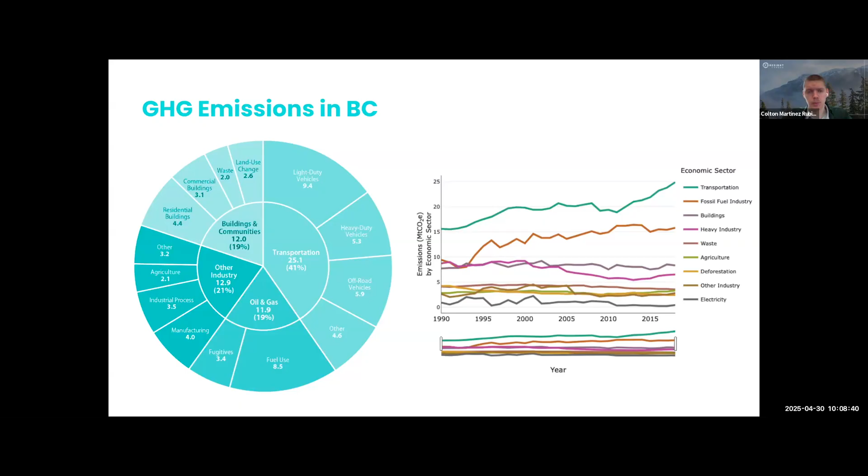So some commitments to reducing emissions that we are aware of now. At the federal level, there's been a commitment to reduce emissions nationwide to net zero by 2050. This means that by the year 2050, our economy either emits no GHG emissions or offsets emissions. This offset can occur through technological or nature-based means to sequester or capture carbon dioxide.

In BC, we have a commitment to reduce greenhouse gas emissions by 80% by 2050. And of course, the government introduced the Climate Change Accountability Act, which put climate accountability into law for BC and mandated the creation of action plans, monitoring and reporting, and established important interim emissions targets of 40% by 2030 and 60% by 2040.

These commitments mean that exploring multiple low carbon energy sources, technologies, and innovations will be needed to meet emissions reductions goals. This is what we're beginning to talk more about, moving away from reliance on carbon emitting energy sources as a society and exploring low carbon pathways.

The province also has a provincial hydrogen strategy and hydrogen office. And some of the commitments that we'd like to highlight include the commitment to introduce targets for the sale of zero emission medium and heavy duty vehicles, which is of course important for hydrogen.

The hydrogen fueling infrastructure program, which supports the installation of hydrogen fueling infrastructure in BC. And to remain a leader in low carbon fuel use and production, BC has increased its target to 1.3 billion liters per year by 2030 and will require about a 10% reduction in the carbon intensity of jet fuel by 2030.

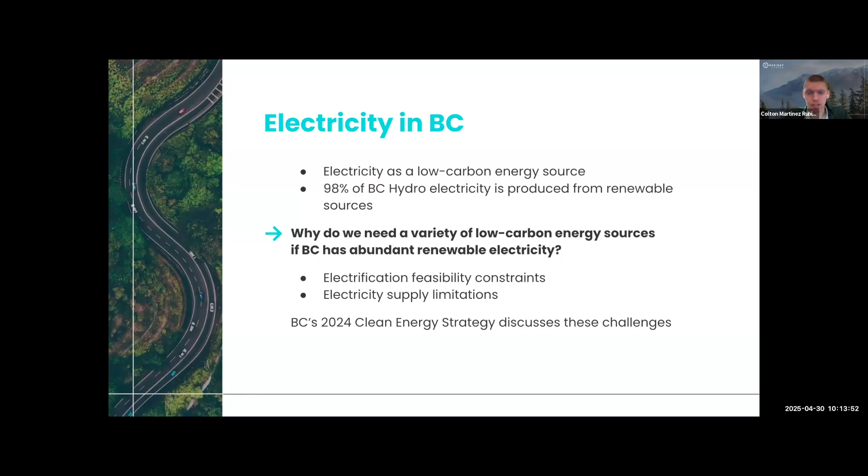For more information on the future of BC's electricity system, I highly recommend anyone interested take a look at BC Hydro's latest work on its integrated resource plan, which will be coming out this year.

So in summary, in situations and use cases where electrification is not possible or economically feasible, low carbon hydrogen could potentially be a complementary solution to electricity. Hydrogen as a fuel has some unique advantages that we're going to discuss in the upcoming sections. And of course, it can be made in BC with a low carbon footprint.

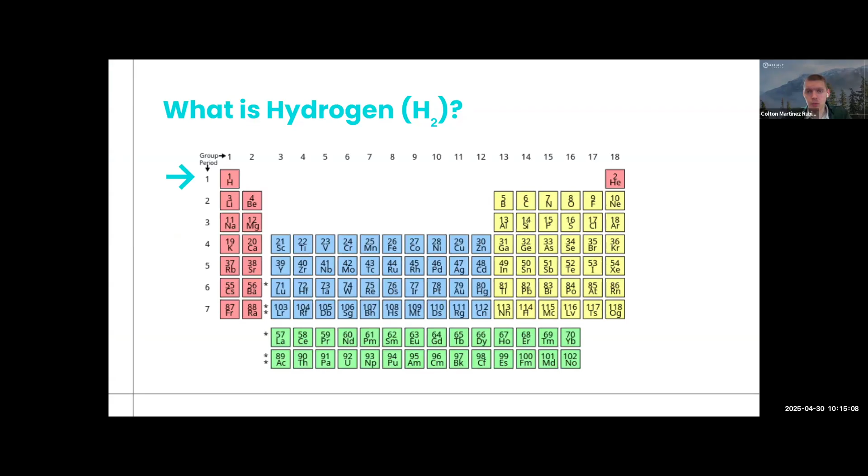So first, what is hydrogen? Hydrogen is a gas and is the lightest element on the periodic table. Hydrogen is not found naturally as H2 - it's a very reactive element, and so any naturally occurring hydrogen will be bonded to another element. This is important to note because any hydrogen we use is produced.

Hydrogen as a molecule is commonly used today as a component of various industrial processes, such as refining petroleum products, metal production, chemicals, fertilizers, and food processing. The other new use for hydrogen, new being a relative term, is as a carrier of energy. Hydrogen requires an input of energy to produce it, and we can then use hydrogen as a low carbon fuel, as we discussed.

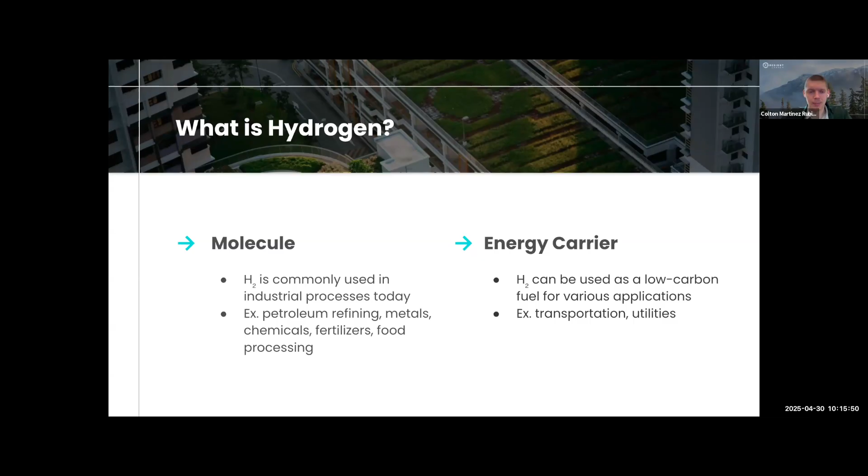Hydrogen can be considered a fuel for important applications we'll get into further, such as shipping, as I noted previously, but also rail, trucking, and aviation. We'll get into that in a bit more detail.

So, making hydrogen. Hydrogen pathways are often referred to by colors in the media, so we continue to use that vernacular for now. Low carbon hydrogen can be made via pathways including those pictured here. Blue, green, turquoise. Gray and brown hydrogen are not low carbon - they represent some of the existing ways that industries have produced hydrogen and yield significant emissions.

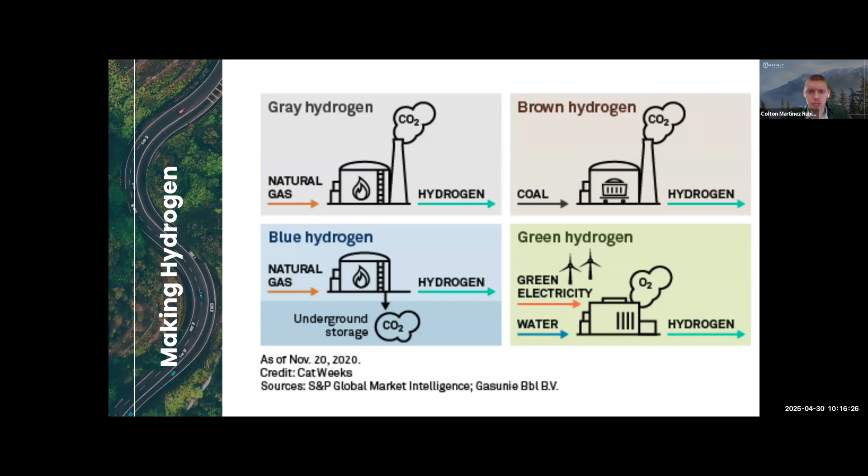The easy way to think about gray and brown, for example, is produced by coal or produced by natural gas without carbon capture and sequestration technologies. We'll speak about each of these pathways in a bit more detail.

So first, hydrogen produced from natural gas. The production of gray hydrogen through steam methane reforming is currently the most cost-effective and widely used hydrogen production process on the planet. This hydrogen is primarily utilized for producing ammonia for fertilizers and upgrading petroleum products in refineries, but it does have a high carbon intensity.

When the CO2 emitted during gray hydrogen production is captured or sequestered and utilized, the resulting hydrogen is known as blue hydrogen. The capture and sequestration of CO2 can be achieved through various methods, including injecting that CO2 deep into the Earth's crust.

Autothermal reforming is a technology used to produce hydrogen for methanol and ammonia production. It's being proposed as a method to produce low carbon intensity blue hydrogen from natural gas because it enables higher rates of carbon capture compared to conventional SMR, and at a lower cost.

The other pathway shown here in the diagram is turquoise hydrogen, which is produced from natural gas through a process called pyrolysis. This produces solid carbon as a byproduct instead of carbon dioxide, which can be used in materials manufacturing. This method has the potential to produce hydrogen with a relatively low carbon intensity as a result of having the solid carbon byproduct displace carbon from other fossil sources.

There are various natural gas pyrolysis technologies available, and these technologies, of course, utilize electricity to drive the process, which is advantageous in BC with our grid.

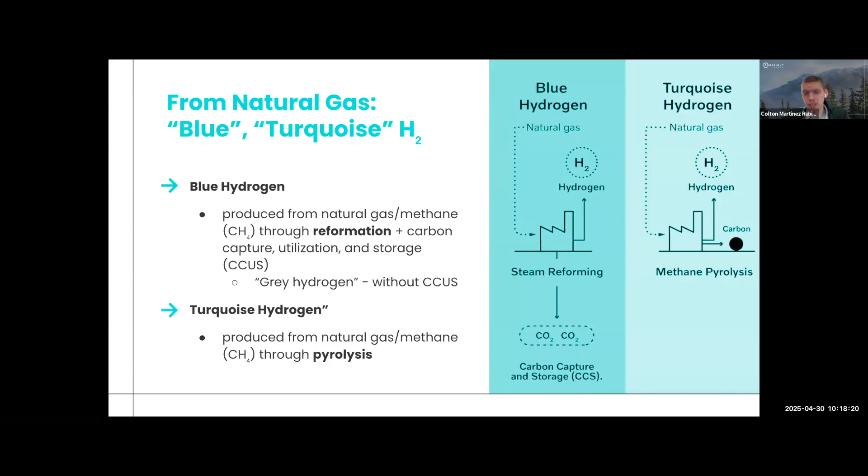A note on solid carbon: amorphous black carbon, a byproduct of this process, is commonly used in industries worldwide for applications such as manufacturing rubber for tires, pigments, polymers, and printing inks. Depending on the source of heat, the process may or may not emit GHGs, but emissions are significantly lower than what we've seen for methane reformation.

Waste hydrogen is also a pathway in BC. Waste hydrogen is often produced as a byproduct of various industrial processes, such as chloralkali production, sodium chlorate production, petrochemical refining, and steel manufacturing.

In the chloralkali process, for example, hydrogen is generated alongside chlorine and sodium hydroxide during the electrolysis of brine. Similarly, in petrochemical refining, hydrogen is produced during processes like catalytic reforming and cracking.

HTEC has an incoming liquefaction facility for byproduct hydrogen in North Vancouver. In BC, the forestry sector is looking at opportunities to reduce emissions, and byproduct hydrogen could be compressed and purified for use at pulp mills, for example.

A local BC company, Hydra Energy, enables commercial fleets to convert existing diesel trucks to run on a hydrogen diesel mix. They've partnered with companies to use some waste hydrogen to power their dual fuel Class 8 trucks, as an example.

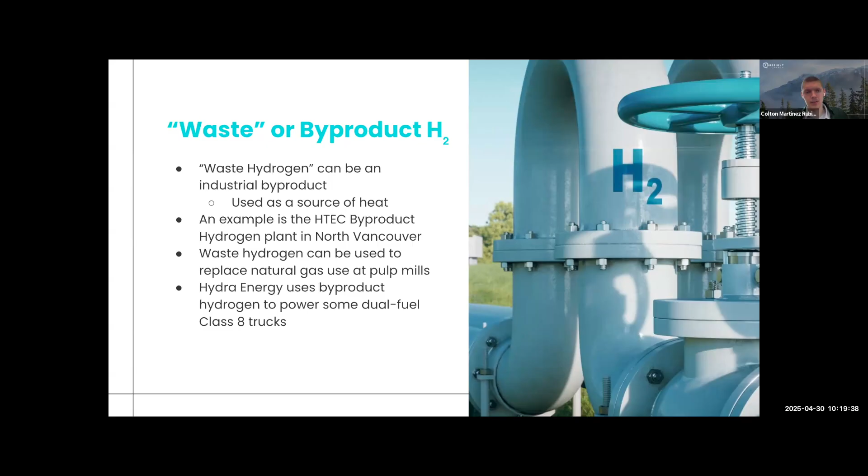That said, an important consideration is that in the public modeling we have available today, waste hydrogen really only represents a small amount of hydrogen consumption and potential production in BC, so it should be taken with a bit of a grain of salt.

Green hydrogen is produced through a process known as electrolysis. This utilizes an electrolyzer to split purified water molecules into hydrogen and oxygen. Unlike traditional hydrogen production methods that we discussed earlier, which often rely on fossil fuels like natural gas, these energy sources have low carbon intensities, in some cases close to zero.

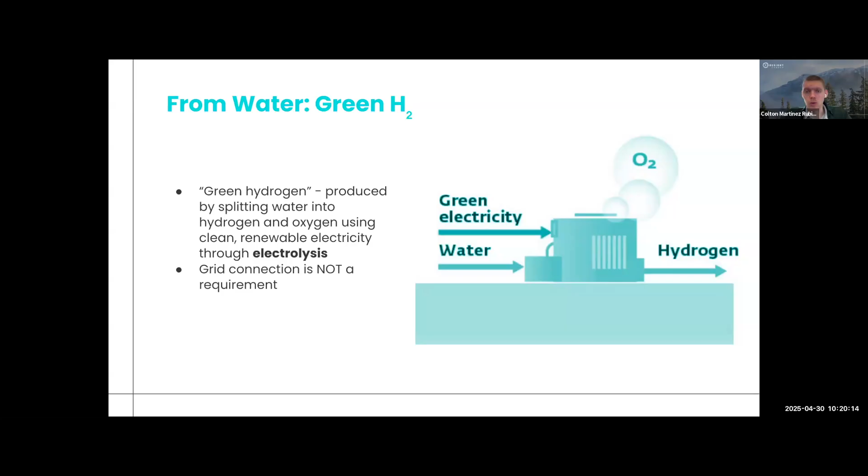The electricity, importantly, does not necessarily need to be grid connected, but that does impact the cost, and we'll discuss that further. It's important to note that there are electrolyzers already in operation in BC today, and more projects are on the way.

When comparing these production pathways for hydrogen, the two factors we really need to discuss are carbon intensity and relative cost. While the use of hydrogen doesn't produce any GHG emissions, the production and transportation does. The key point is that when looking at the carbon intensity of any hydrogen production pathway, the entire life cycle needs to be considered: the feedstocks, the transportation emissions associated with the infrastructure, and of course the production process.

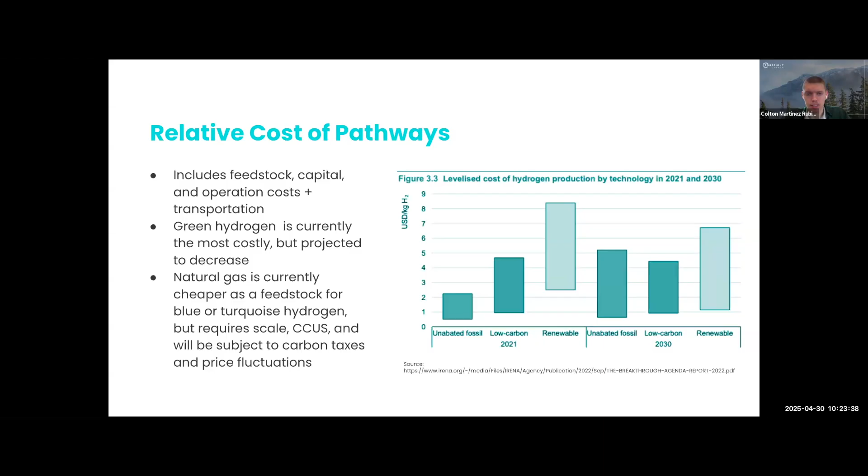First, for blue hydrogen, the price of natural gas is a really crucial factor, after the cost of sequestration. Assuming plants are built at the source, this report found that where natural gas is cheapest and sequestration opportunities are available, any rise in gas prices would be the biggest negative impact on hydrogen costs. This can be mitigated by the expectation that sequestration costs in BC would decrease over time.

Also important to consider is the capital cost, with the most significant expense being the need to install both SMR reactors and carbon capture, compression, and sequestration infrastructure.

For turquoise hydrogen, the cost of natural gas as a feedstock is the most significant factor as well. Since there's no carbon capture or sequestration required, the process is easier to locate and operate. However, the conversion efficiency is lower than that of SMR, leading to higher overall production costs.

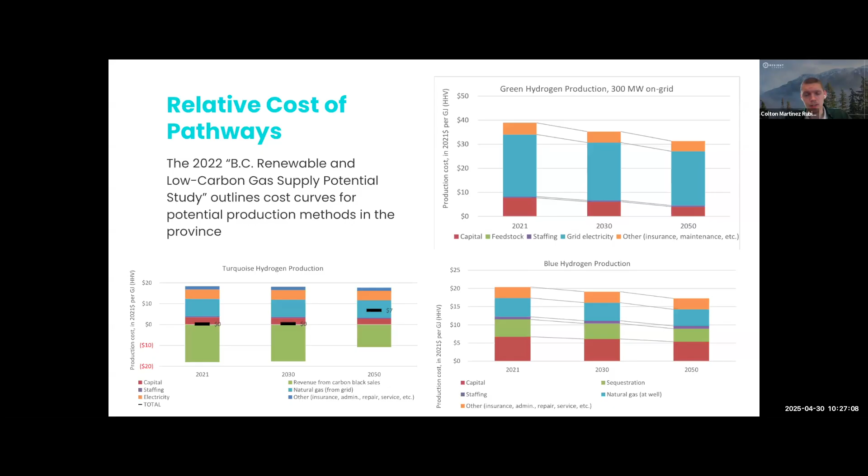So this is a bit of a backgrounder to give you an idea of what the public literature says today, and perhaps the important takeaways we can take moving forward. Obviously, each of these production methods shows a declining cost over time, and there's a really enormous opportunity on the turquoise side for carbon black sales if that market materializes.

So, in summary, electrolysis, reformation, CCUS, and pyrolysis are all possible pathways to produce low carbon hydrogen in BC. Cost and carbon intensity are critical to consider for each pathway.

The simple way to think about it would be that green, as literature shows today, would be lower carbon intensity and higher cost, while blue would be higher carbon intensity, lower cost, and the important turquoise being potentially the lowest cost, but at a higher carbon intensity than green tends to show right now.

So with that, I'd like to turn it over to my colleague Aislinn, who's going to chat a little bit about hydrogen transportation and some of the findings from our recent report.

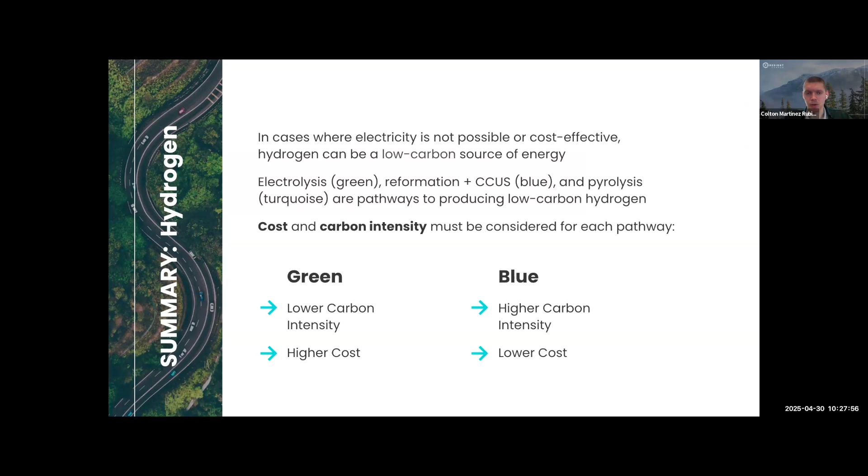Thanks, Colton. As mentioned, last year we completed a report in partnership with Sacre-Davey that looked at the opportunities and risks of transporting hydrogen across BC.

Transporting hydrogen is an important consideration to the feasibility of the various use cases mentioned. We need to look at where hydrogen can be produced, where it can potentially be used, and determine how it can be transported and whether or not it makes economic sense.

Generally, hydrogen can be transported in specialized cylinder containers by truck or by train, in pipelines, or by ship. Hydrogen can also be transported by chemical carriers or as substances that store and transport hydrogen, enabling its future end use. There are various different considerations with each type of transportation method.

Hydrogen can be transported in its pure form as a gas or a liquid. However, there are advantages and trade-offs with both options. Hydrogen is a gas at standard temperature and pressure, but due to its low volumetric density, transporting large volumes of hydrogen as a gas can be quite inefficient. Gaseous hydrogen also needs to be transported under high pressures in specialized containers.

Hydrogen can also be transported as a liquid, which is much more efficient for large volumes. But to liquefy hydrogen, it needs to be cooled to minus 253 degrees centigrade. This process is very energy intensive and can be expensive. Liquid hydrogen also needs to be stored and transported in specialized super insulated cryogenic tanks.

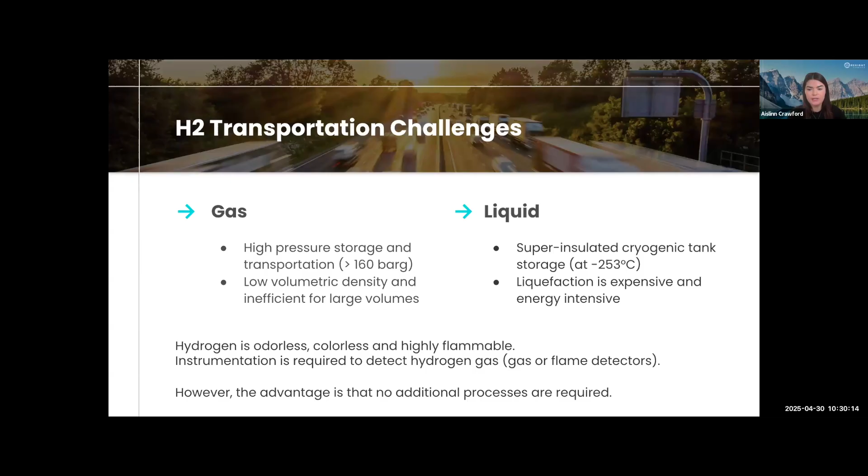Hydrogen can also be transported via chemical carriers. In our study, we looked at 3 different types of hydrogen carrier: ammonia, methanol, and liquid organic hydrogen carriers. Ammonia is widely used as an agricultural fertilizer and in industry, so the transportation and handling processes are already well established.

The liquefaction process here is also less energy intensive than liquefying hydrogen, but the trade-off is that it is toxic and can harm the environment and human health in the case of a spill or an incident.

Methanol is also widely used in industry and it's a liquid at standard temperatures and pressures, so this makes it easier and cheaper for transportation and storage. One drawback is that conventional production methods for methanol can be quite energy intensive, so green or e-methanol production methods are being promoted to reduce carbon emissions associated with the production process.

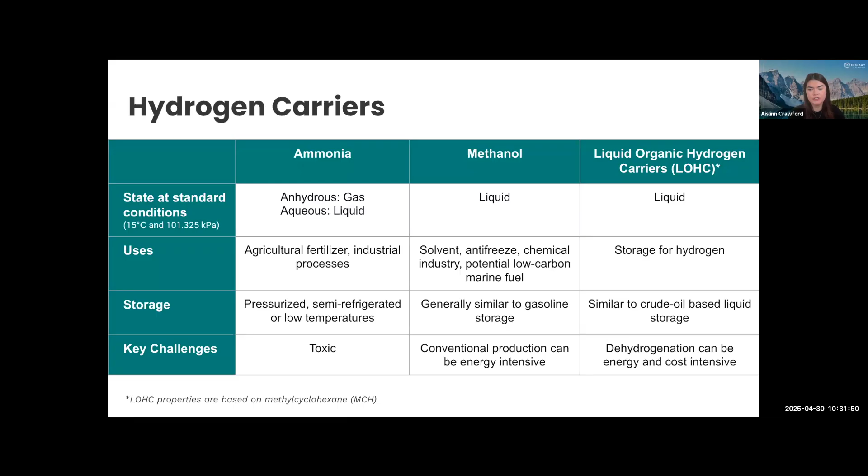Finally, liquid organic hydrogen carriers are a group of organic compounds that can absorb and release hydrogen through chemical reactions. These are also liquid at standard temperatures, so they can be transported and stored in similar ways to other liquid fuels such as diesel or gasoline. The disadvantage here is that the dehydrogenation process can be energy and cost intensive, and in all of these cases, there are additional steps to release the hydrogen, which is again the advantage of transporting pure hydrogen.

As mentioned, there are various advantages and challenges with each hydrogen transportation option. The most suitable option would be dependent on the production site location, the end use requirements, and the volume of hydrogen to be transported. So some of the key considerations for infrastructure include regional differences.

There will also be variable costs associated with infrastructure upgrades, largely dependent on location requirements. New hydrogen pipelines would be very expensive. There is also potential for environmental and social impacts, particularly for construction of new major infrastructure, but again this depends on the location.

For some carriers and modalities, specialized containers would be required. In some cases these are already available, but in other cases, such as rail transportation, further development and standardization is required. Finally, there is additional market potential for hydrogen carriers such as ammonia and methanol, as these have other industry applications, particularly with growing interest in e-methanol as a potential low carbon shipping fuel.

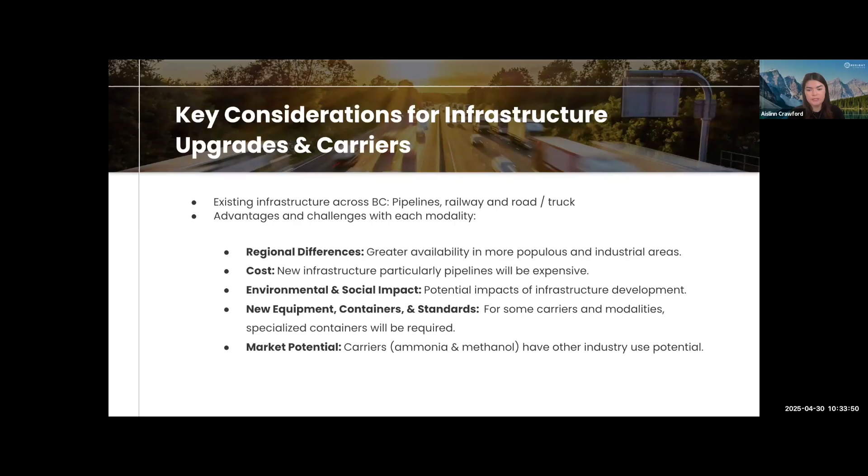Our report also looked to identify hazards and safety risks specific to BC. Depending on various factors such as transportation method, location, and hydrogen carrier, there are different considerations to promote safety and manage the risk of incidents.

Potential hazards can include environmental factors such as adverse or extreme weather events, or human factors such as accidental releases or road and traffic accidents. The potential consequences of incidents are also variable, depending on the carrier or form of hydrogen and the environment. This highlights the need for specific risk assessments for individual transportation options.

Finally, we looked at incident examples that can indicate preventative measures to limit or manage the risk of future incidents. The report identified key opportunities within BC in terms of hydrogen transportation and provides further recommendations to promote safe and effective transportation across the province.

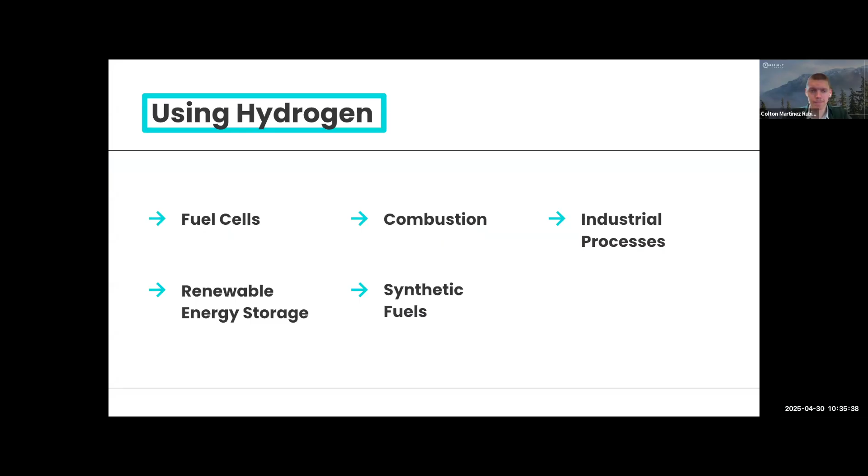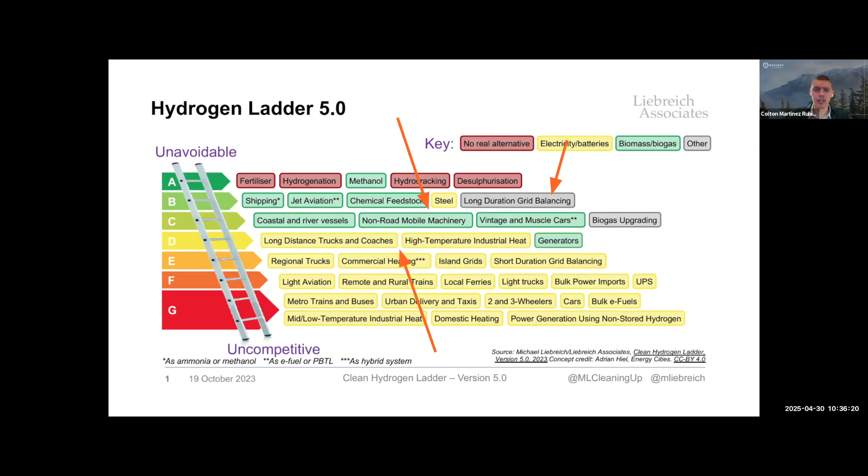For example, mountainous regions in BC would potentially make hydrogen a better option for long distance trucking. Another example would be BC's large forestry sector, which could make hydrogen a good option for non-road mobile machinery in remote areas, for example. We'll get into many of these in a moment.

One way we can use hydrogen as an energy source is in a fuel cell. As many of you may know, fuel cells function like a battery. Hydrogen is added as a fuel, which ultimately creates electricity, water, and heat. Fuel cells do not create emissions, air, or noise pollution, and are quick to refuel, similar to conventional gasoline or diesel.

Vehicles powered by fuel cells are typically referred to as fuel cell electric vehicles, or FCEVs. An alternative technology to consider, which we all know, is battery electric vehicles, more prevalent for passenger vehicles currently in BC. They require a longer charging period, but are more energy efficient than an FCEV. Because of the quick refueling times and long range capabilities, hydrogen used in a fuel cell electric vehicle is considered to have a potentially viable use case in those long range applications.

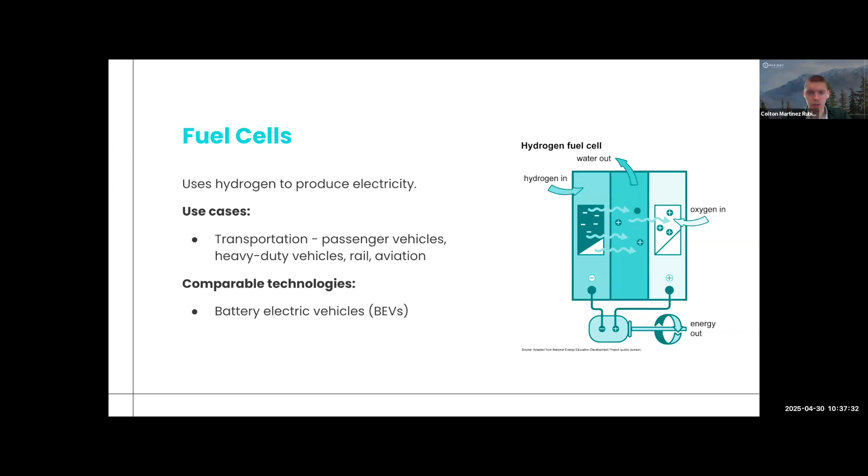Think long haul trucking, but in BC we could also consider freight rail and aviation. HTEC, a company here in BC that we'll hear from shortly, has active fueling stations in BC in the Lower Mainland - Burnaby, Vancouver, North Vancouver - and there are additional planned stations coming, including in Tsawwassen, Surrey, and Vancouver as well.

Hydrogen can also be directly burned as a fuel, similar to how someone would combust natural gas. These use cases include using hydrogen for building heating. This is a proposed avenue that some utilities are proposing to reduce the carbon intensity of the gas supply, predominantly by blending it with natural gas and injecting it into pipelines, which are currently used for heat and power in buildings. There are some logistical and safety challenges associated with this.

Some pipelines would need to be retrofitted and new pipelines constructed to accommodate hydrogen gas. The cost of doing this is also much higher than the current price of gas. Fortis BC has commissioned a comprehensive blending study for its distribution network across the province to examine this challenge. However, the recent analysis from the BC Centre for Innovation and Clean Energy did find that blending into the provincial gas grid at safe levels could yield only emissions reductions of approximately 1.4 to 4%.

So pretty marginal emissions gain, and there could be better uses for hydrogen in BC than heating, particularly if we have a limited amount. Some alternative technologies, of course, electric heat pumps, proven and pretty readily available in parts of the province.

Co-combustion technology is another important one to note. For heavy-duty transportation, I mentioned this earlier, companies like Hydra Energy use this method to blend hydrogen with traditional fuels in heavy-duty engines, and this allows for cleaner combustion on the road and reduced GHGs. Co-combustion is a limited alternative to fuel cell electric vehicles or battery electric trucks in specific hubs, while those technologies are commercialized. So in this transition period that we're in right now, it's a great technology to take advantage of.

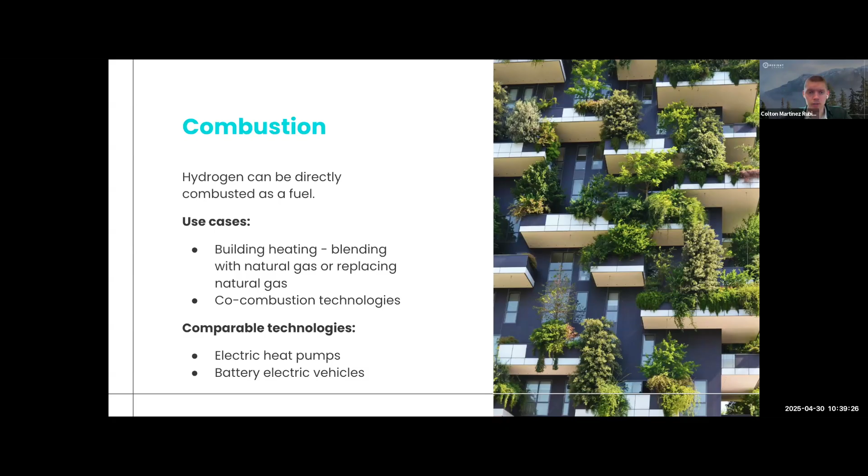Hydrogen can also be used to decarbonize industrial processes. Some of these use cases to note would be hydrogen as a fuel, first off. Hydrogen can be combusted directly in boilers, furnaces, turbines to generate heat or electricity without producing carbon dioxide emissions. This could be particularly beneficial in industries such as manufacturing, refining, chemicals production, where high temperature heat is required. Heat treatment processes are common in the manufacturing of metals and alloys, including steel and aluminum, for example.

Another would be hydrogen for hydrogenation reactions. Hydrogen is widely used in industrial processes for these reactions. For example, hydrogenation is essential in the production of margarine, edible oils, petrochemicals. These reactions typically require high purity hydrogen, which can be produced via steam methane reforming that I discussed earlier, or electrolysis.

Another important one would be hydrogen as a chemical feedstock. Hydrogen serves as a crucial feedstock in various chemical manufacturing processes. For instance, it's used in the production of ammonia, methanol, that Aislinn discussed earlier, and I'll talk a little more about, and other industrial chemicals. Ammonia production, in particular, is one of the largest consumers of hydrogen globally. Currently, ammonia is primarily produced via the Haber-Bosch process, which relies on fossil fuels as the hydrogen source. Transitioning to green hydrogen for ammonia synthesis could substantially reduce carbon emissions in that sector.

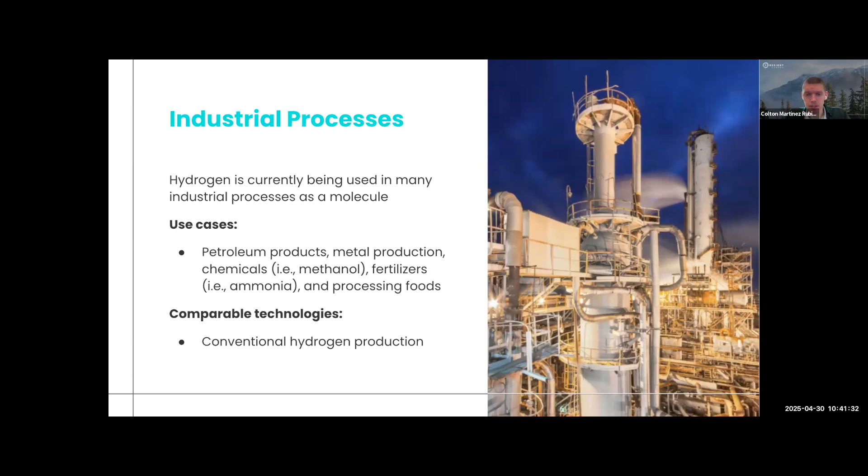Another one I alluded to earlier is hydrogen for steel production. Steel and aluminum being one of the largest industrial emitters of CO2 due to the reliance on coal and coke in blast furnaces. Hydrogen has the potential to decarbonize steel production through two main pathways: direct reduction of iron ore using hydrogen as a reducing agent, and as a source of heat in electric arc furnaces. Both methods can significantly reduce emissions compared to traditional blast furnace processes.

The next I'd like to talk about is renewable energy storage. As many folks know, hydrogen can be used as a form of energy storage, electricity when generated using renewable sources can be used to produce hydrogen through electrolysis. This hydrogen can be stored until needed and then used as a fuel for power generation during, say, peak demand times or when solar or wind resources are unavailable in certain parts of the province.

This is complementary to electricity deployment, particularly for remote communities that aren't grid connected. It can help communities transition away from a reliance on diesel power generation. Hydrogen, of course, is not the only low carbon fuel being looked at for off-grid power generation, but is one of the available options that we should consider.

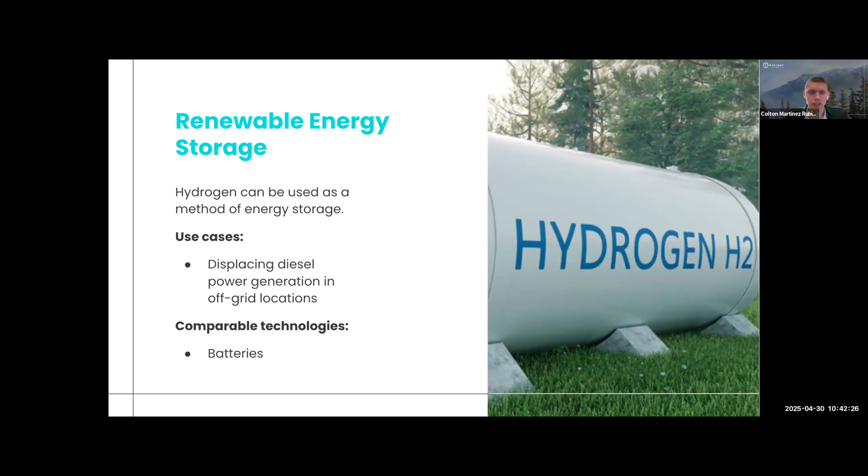And then synthetic fuels. As we talked about earlier, hydrogen is an essential component in the development of synthetic fuels. These are manufactured, don't come from naturally occurring oil, but have the same properties, so they can be used in the same way as conventional fuels. Synthetic fuels are likely needed as a replacement for aviation and marine fuels, for which electrification, as I mentioned earlier, is not necessarily feasible at this time. Shipping and aviation are considered hard to decarbonize sectors because of those long distances and weight and space limitations.

To get into a little bit more detail on the methanol and ammonia pieces: methanol is a common industrial chemical used today, as Aislinn discussed. It's under consideration as a commonly produced and transported substance that reduces carbon and other pollutant emissions compared to marine diesel. Ammonia, as I discussed earlier, is one of the most widely used and produced industrial chemicals across the globe, with one of its largest applications being fertilizer production, where it serves as a vital nutrient source for crops. Additionally, ammonia is used for a variety of other chemical purposes.

This really has the potential to serve as a clean and renewable fuel for the maritime transportation sector I discussed. Lastly, sustainable aviation fuel, or SAFs—a term for low carbon fuels produced for the aviation sector. This non-fossil derived jet fuel, almost identical to conventional jet fuel, can be used as a drop-in fuel, meaning no retrofitting is required for existing engines.

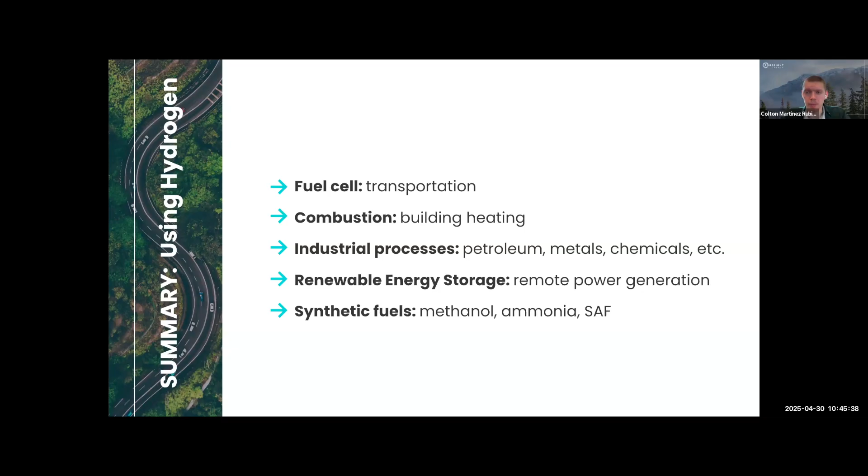I'd just like to close my presentation with one final poll. Where do you see opportunities for hydrogen in your community, based on what you know today as well as some of the information we presented? I'll give everybody a moment to respond to this.

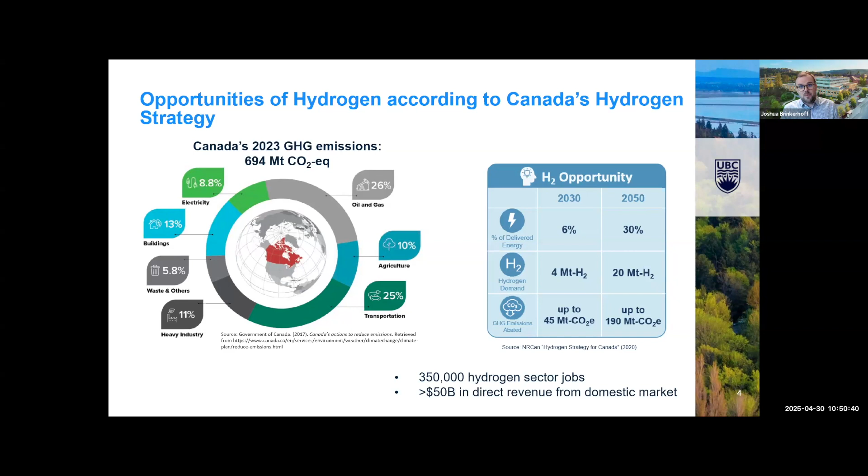But this is not going to happen just by itself. It needs a concerted effort, and it needs collaboration across a whole range of stakeholders. This was presented already a little bit in the previous work, but to understand the challenges and opportunities, it really does require a good appreciation of the complex nature of hydrogen as an energy carrier.

I think the right word is energy carrier, because hydrogen is a way in which energy can be stored, carried, and then used. One of the main challenges, of course, is that hydrogen is energy dense by mass, but not very energy dense by volume. And this creates challenges for producing hydrogen, and then using it in end-use applications as well.

So currently, the sources of hydrogen predominantly are natural gas, byproducts from other industrial sources, or other energy sources as well. And the end uses, as was presented already, focus primarily on industrial applications.

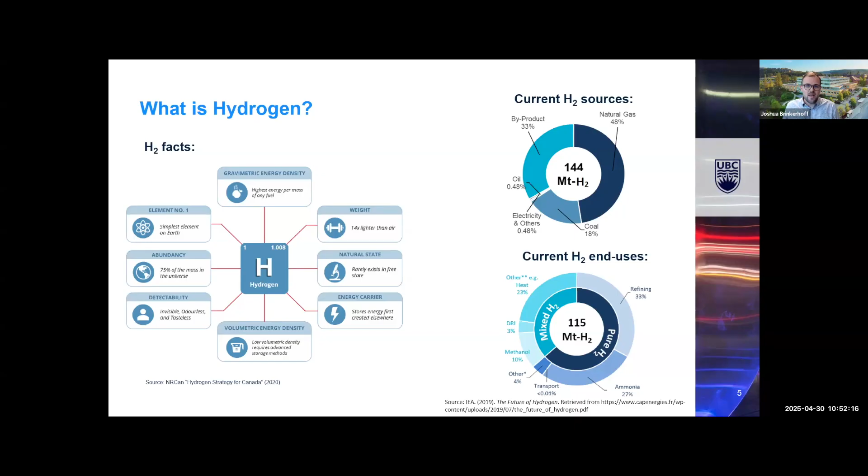So to achieve the decarbonization goals, we need to do primarily two things. We need to find cleaner ways of producing hydrogen at scale that are economical. And then we also need to develop technologies to deploy hydrogen as an alternative for existing incumbent high emissions technologies or high emissions pathways.

We have the production of hydrogen from renewables. We have the production of hydrogen through alternative uses of existing fossil fuels, such as pyrolysis of natural gas, the sequestration of carbon emissions associated with fossil fuel use, the development and storage of hydrogen and using it for transportation, or for material handling, or for power production, or for building heating, as was highlighted already.

And that, as I mentioned, is an important role for academics and academia, to assist in a sense, to kind of be the conduit through which existing stakeholders can come together, can work together, and can develop technologies that are allowing hydrogen to integrate within the broad energy system.

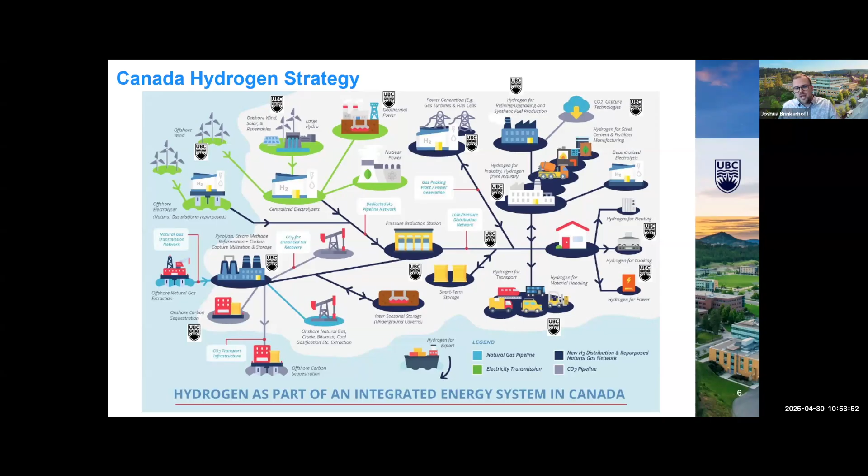To focus more on BC specifically, the BC Hydrogen Strategy identifies two primary production pathways for hydrogen that are relevant to BC's electricity grid. The first is through renewable electricity sources, such as hydropower, wind, or solar, or other sources. And then reuse of fossil fuels to produce hydrogen and then sequestering the carbon in some manner.

The role that UBC Okanagan is playing is both in terms of the development of technology for the electrolysis of hydrogen, for the production of renewable electricity, and then also looking at ways in which the pyrolysis of methane to produce hydrogen could also result in value-added products as well.

Once hydrogen is produced, it needs to be stored or distributed. UBC Okanagan is also involved in looking at chemical carriers and pipeline storage. We're working with FortisBC to research the codes and standards necessary for safely introducing hydrogen into our existing natural gas pipeline, or the important considerations for the liquefaction of hydrogen and its storage. What happens if there's an accidental spill of liquid hydrogen, or a release of gaseous hydrogen blended with natural gas at high pressure? What new safety measures need to be put in place to address those challenges? These are questions we're trying to investigate alongside partners within the province.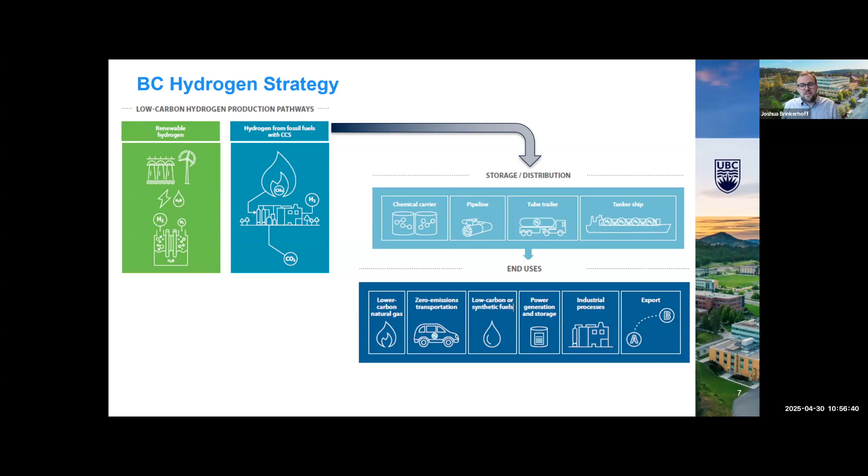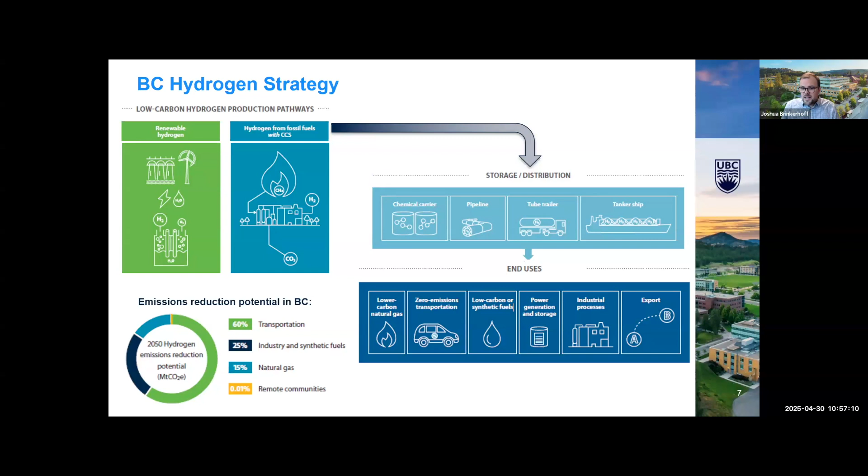These are important questions to understand, and this is work being done within the campus, with the overall objective of helping the province achieve its emissions reduction potential. This is the way the BC Hydrogen Strategy sees the possibility for hydrogen achieving up to a 60% reduction in transportation and other areas. Whether these can be realized is still to be determined, and it requires continued work.

So achieving this BC Hydrogen Strategy, there was a plan laid out alongside a BC hydrogen study in 2019, and it laid out the pathway in the following ways: first phase is development of supply and infrastructure, the second phase is commercial introduction, and the third phase is commercial expansion. We're already 5 years into this plan, so there's probably room for tweaking or adjusting.

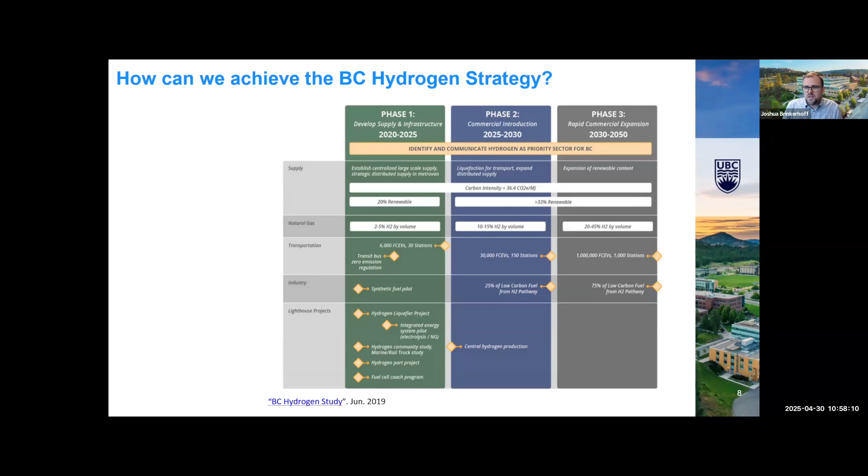In the context of this plan, I wanted to highlight how work within UBC Okanagan is helping contribute to this goal and follow the development plan for hydrogen within the province. So to do that, I'm going to overlay research topics that are ongoing with partners on top of this plan to show alignment within the provincial hydrogen strategy.

The first one is we have a FortisBC research chair, that's Professor Huagi, working with FortisBC to look at ways in which existing electricity grids can be deployed in a smart way to support the decarbonization of our electricity supply, which is critical if that electricity will be used for production of renewable hydrogen.

We are working with FortisBC - this is actually 6 researchers understanding blending of hydrogen into natural gas from a whole host of different angles: the production of hydrogen in a renewable way, the injection process and ensuring that is done in a predictable and safe way. When you introduce hydrogen, you're changing the energy mix because of the different energy density of the gas. That changes the flow rate, which changes the pressure losses, the transmission losses, and so forth, and this needs to be modeled. Also understanding the potential safety considerations if hydrogen is accidentally released, if there's a failure in the natural gas grid.

Of course, when you introduce hydrogen, it burns differently than natural gas, and this needs to be understood both from a small appliance application, like a boiler in your home, or from a large appliance, like a gas turbine combustor powering your gas pipeline compressors. So this is also another area for research.

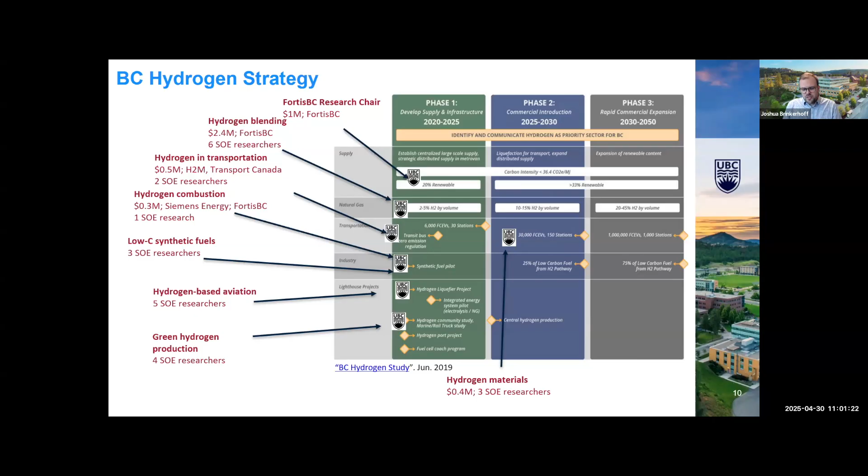Mentioned already is the important work around the materials for storing, transporting, and using hydrogen, which is another important area for research. So from these, I'll just highlight a handful of important activities that are taking place.

The one that was mentioned already is a project with Fortis BC, in which we're studying a whole host of different topics around blending hydrogen into natural gas pipelines, from the injection and transmission aspect to flammability and safety risk associated with the blending, the detection of leaks of hydrogen in a high specificity and high throughput manner, the material embrittlement concerns that might come out of the injection or blending process, and developing a digital twin of this whole blending system so that we can see how the grid as a whole provincial entity responds if you introduce hydrogen and change the composition of the energy mix, along with the combustion aspects.

Some applications may not tolerate hydrogen in the mixture, particularly if the gas is being used not for burning but as a feedstock for some industrial process. So how do we then remove the hydrogen afterward for certain customers who may not tolerate its use? This is ongoing work with Fortis BC.

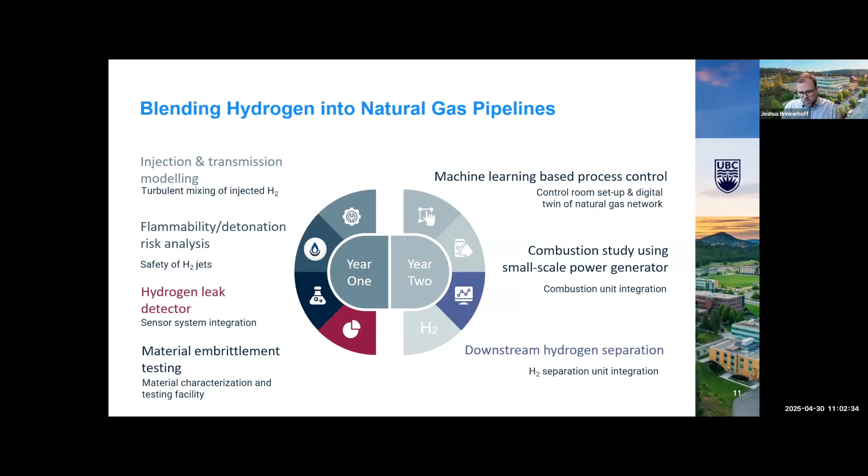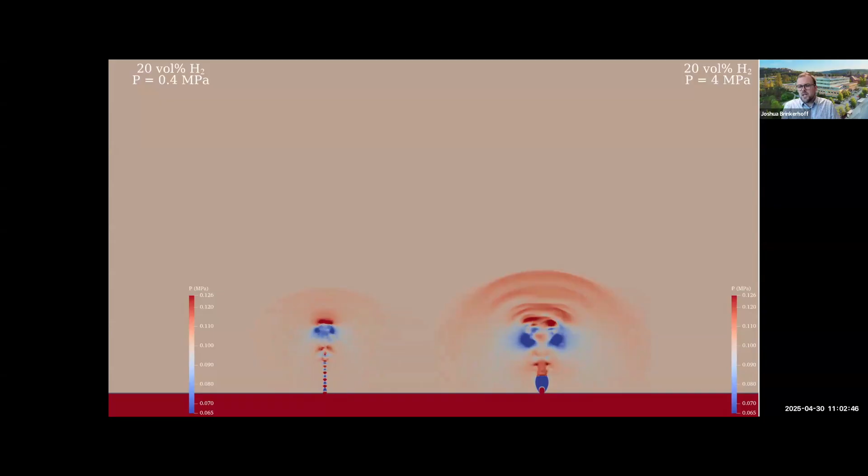Just to highlight one of the results, this is a computer simulation looking at the way a high pressure jet will behave if released following an accidental puncture of a high pressure pipeline. On the left-hand side, the video shows the development of this jet with a 20% by volume hydrogen mixture at low pressure, 0.4 megapascal, typical of a distribution pressure line. On the right-hand side, the same jet but at a transmission pressure, 4 megapascal. We can see this showing the instantaneous pressure field in the jet.

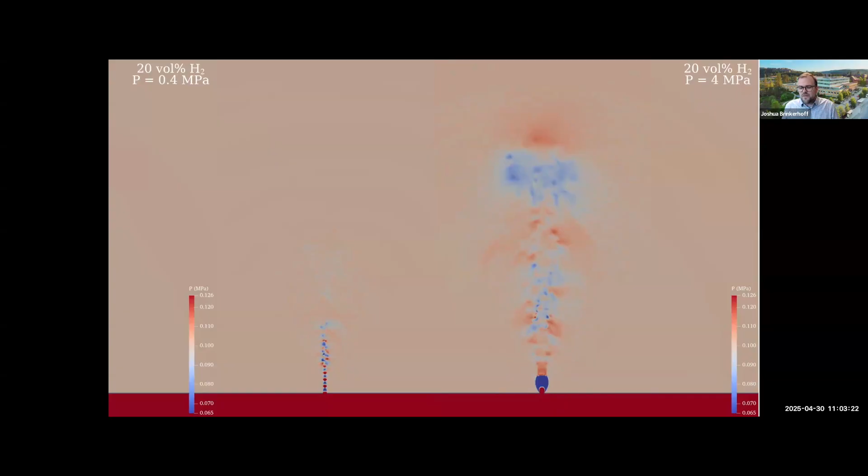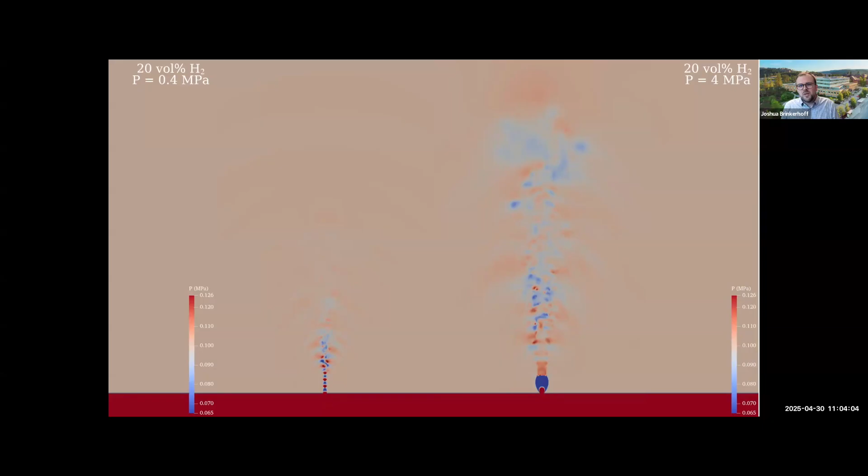The behavior of the jet is quite different. In the low pressure condition, it forms a high velocity jet with interacting pressure fluctuations that maintain a high velocity, and mixing is delayed. In the high pressure condition, you have what's called a Mach disk, where there's an abrupt deceleration of the jet, and the turbulence enhances the mixing. All of this affects the safety precautions and classification of equipment in the context of responding to an accidental release. Understanding this behavior using computer simulations is critical to safely deploying hydrogen within the natural gas grid.

I did mention the use of hydrogen for heavy-duty decarbonization. This is a project with Southern Railway BC, which is in New Westminster, and Hydrogen in Motion in the Lower Mainland, where the first hydrogen rail switcher locomotive is being developed. This is a real-world application in which the diesel engine was removed from a switcher locomotive, a small train engine that moves cars in a yard, and replaced with a hydrogen storage system, a hydrogen fuel cell, and batteries. We are now testing the use of hydrogen for this application, which has a number of benefits, not the least of which is noise and emissions within an urban environment, because this is operating within a city.

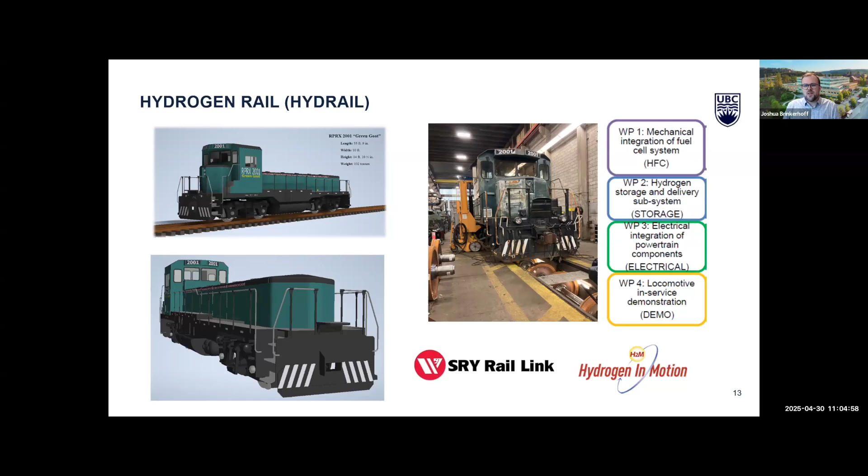So just to put a conclusion on the work, how is the university supporting an interior hydrogen hub? The barriers to achieving our hydrogen economy are clear. If we want to achieve the 2050 goal of 20 megatons of hydrogen per year, the amount of electricity required, if it was all done through electrolysis, would be the equivalent of more than 200 Site C dams, which is really unfeasible. And if it was all done through natural gas, this would be the equivalent of the gas consumption of 43 million homes.

Also on a high level of barrier, which means that there's the need to work together to develop low carbon energy sources, to develop the technology around that, to create the economic and investment opportunities required to support the policy and regulations, which needs science to guide that, and the codes and standards development to support the safe adoption of these technologies, and then public awareness. There's a role for everyone in achieving and overcoming these barriers.

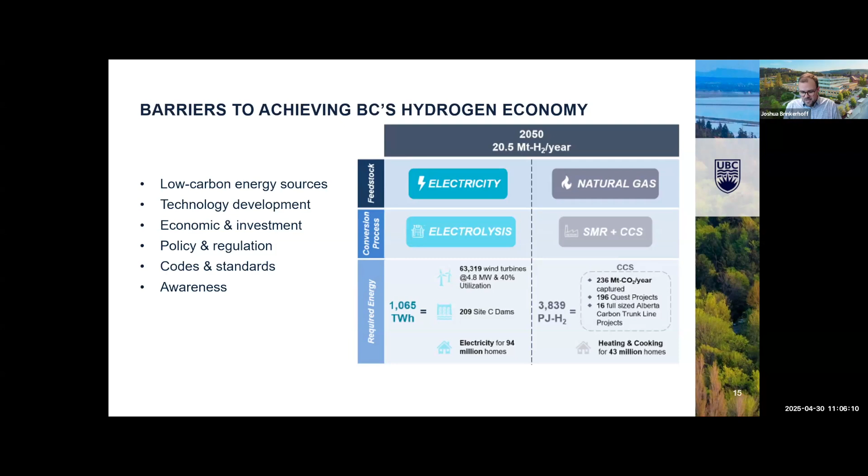When you look at the particular activities involved, we can see the important work of governments, industry, utilities, Indigenous communities, NGOs, as well as the academic sector, with a particular emphasis on academia's important role for cross-sector collaboration, for generating research and funding that research, for building consortiums and developing the industrial partnerships needed to grow regional hubs and domestic flagship projects that can grow and scale up to support the provincial and Canadian goals.

So what is currently underway within the Okanagan campus is the development of a hydrogen training and research center, which focuses on supporting a regional hub for hydrogen research and also supporting the commercial development of hydrogen through the dissemination, creation of research, and then adoption of that research within the technology of our industrial partners.

The focus within this particular hub, given the research strengths of the campus, is around blending of hydrogen into natural gas, combustion of hydrogen, materials for storing and transporting hydrogen, applications particularly in the transportation sector, and also on the safety and storage side associated with end uses.

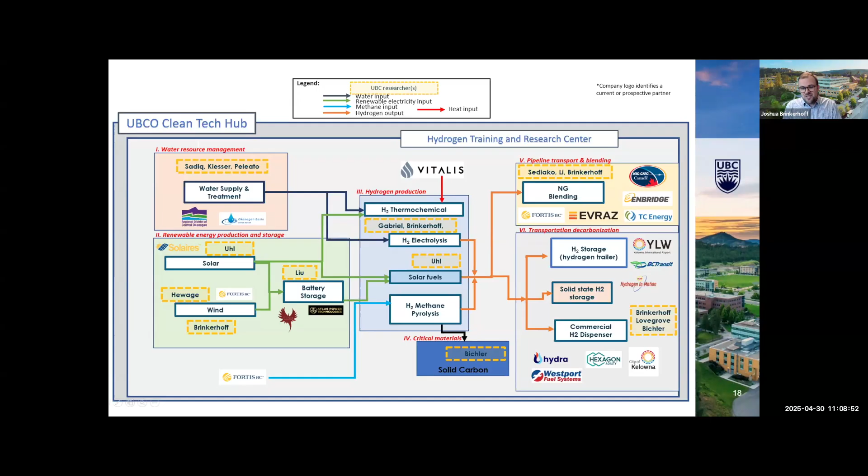I'm very keen to continue working with our existing collaborators and would love to build new collaborations as well, all for the goal of advancing hydrogen work within the region, the interior of BC, within BC writ large, and of course Canada.

To move forward together requires everyone at the table. We need to grow. We need to build these strategic partnerships. We need to engage with one another, developing these technologies. I'd be very open to hearing from you if you have ideas in which you could contribute to this effort together. So please reach out to me with your interests. And thank you for your attention.

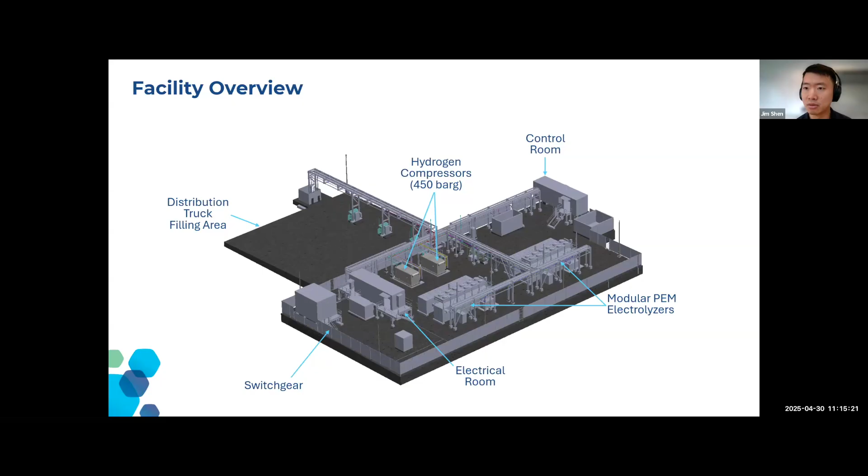Slide, please. Brief overview of where we're at for the project. So as of now, we've procured most of the major equipment already. We have an existing site license agreement with Nanaimo Forest Products, which is the owner of the pulp mill.

We completed the FEED study, the front-end engineering design study, and we just submitted for the building permit with the city last month in March. We're progressing through detailed engineering right now, and we expect to complete that in July of this year. We have approximately a 1-year period for construction, installation, and commissioning, which leads us to January 2027, which we anticipate to start producing at this facility.

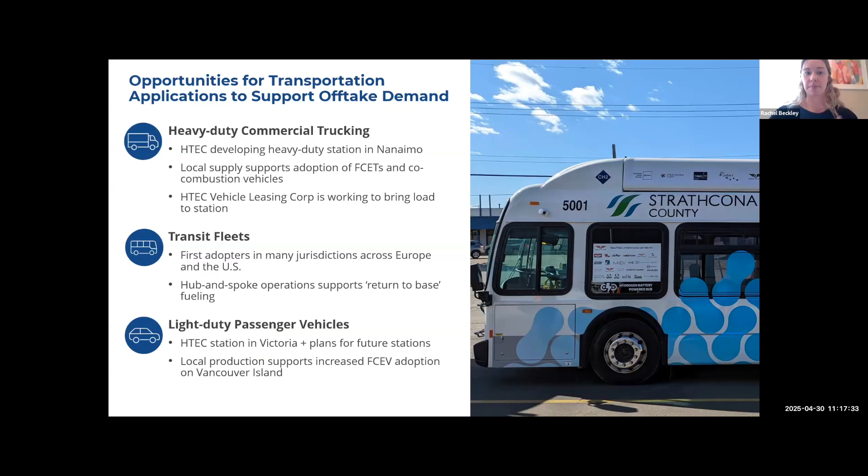And then, of course, there's light duty passenger vehicles, which are already on the roads. We have a station in Victoria, and we have plans for more. And there's also a real opportunity here for light duty fleets - car shares, delivery services, and vehicles that use a lot of fuel.

So what we have done is we've created a wholly owned subsidiary called Vehicle Leasing Corp. And why we did this is we're trying to solve the problem of the chicken and the egg by creating both the supply and the fueling as well as the end use demand.

So as part of the H2 Gateway program that I mentioned earlier, we'll have 100 trucks coming to BC. HTEC will own those trucks and we lease them out to operators who want to have them in their fleet.

And then that reduces the need for operators to put up a large upfront cost to purchase a vehicle brand new, and allows them to test out the technology, see how it fits with their operations, and we'll gather lots of data and information that will help bring these to more commercial operation.

And our full package includes preventative and corrective maintenance services and adoption support. And we also will be working with a safe maintenance facility out of Abbotsford called Velocity, and we've already trained their employees on how to operate and maintain these vehicles.

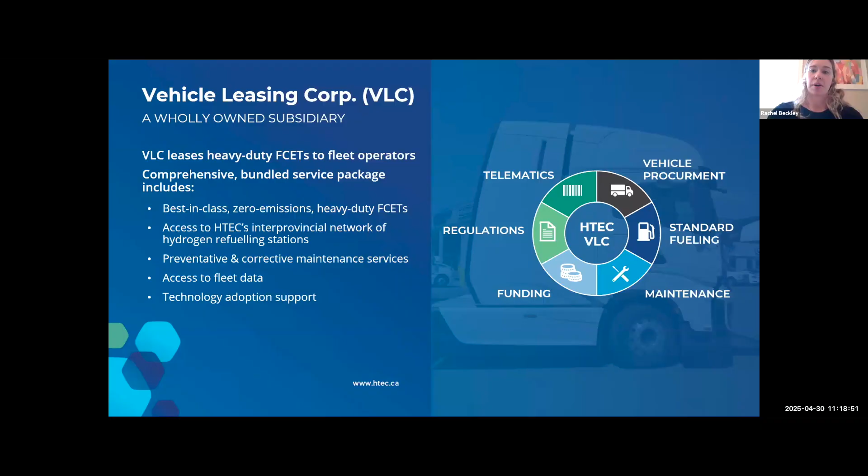But we recently started operating our electrolysis plant in Burnaby, which was a big milestone for us. Previously, we were purchasing hydrogen from third-party suppliers to fuel our stations, and now we have our own supply of low carbon intensity hydrogen. We'll then be supplying that to our first heavy-duty fueling station.

Which will be located on Tsawwassen First Nations land, and that's in partnership with the nation and Parkland, and that's operating near the port, so it will be used for a lot of port applications as well.

And this is BC's first heavy-duty hydrogen refueling station, and it's currently under construction, so hoping that that will be opening by this summer. And then aside from the 100 trucks I spoke about, we have 12 trucks coming, actually 5 are already delivered for pilot purposes.

And this has been supported through the province of BC. So 6 of those will be used at the port and 6 will be used just for heavy duty trucking around the Lower Mainland. And then, as I mentioned, we partner with a safe operator who helps maintain the trucks.